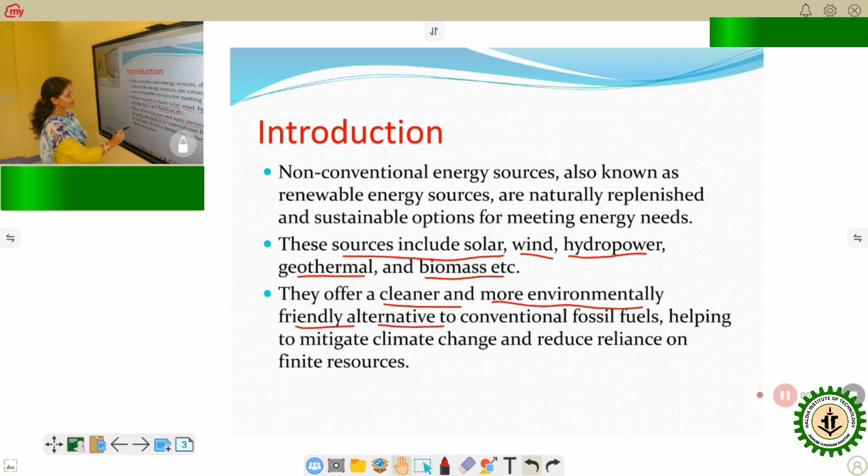Non-conventional energy sources, also known as renewable energy sources, are naturally replenished and sustainable options for meeting energy needs. Replenished means they are not depleted. These sources include solar, wind, hydropower, geothermal, biomass, tidal, etc. They offer a cleaner and more environmentally friendly alternative to conventional fossil fuels, helping to mitigate climate change and reduce reliance on finite resources.

What are the renewable energy sources? One is solar energy, wind energy, biomass energy, geothermal energy, tidal and wave energy, and hydropower.

Now discuss only the overview. Today we will discuss only the overview of solar energy, wind energy, biomass, geothermal, tidal, wave and hydropower. That means discuss only what is solar energy, what are the challenges of solar energy, what are the advantages and what are the disadvantages.

Now first discuss solar energy. It captures sunlight using photovoltaic cells or solar thermal collectors and converts sunlight into electricity or heat. That is solar energy.

What are the advantages of solar energy? Abundant and free, low operational cost and scalable. These are the advantages of solar energy.

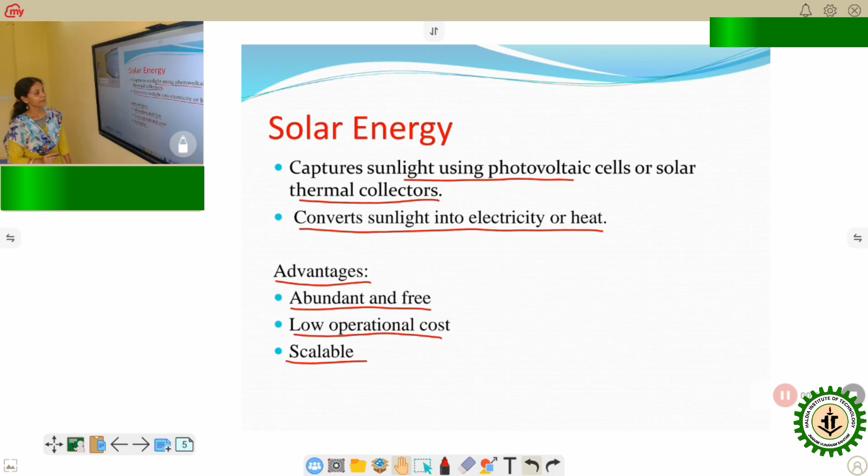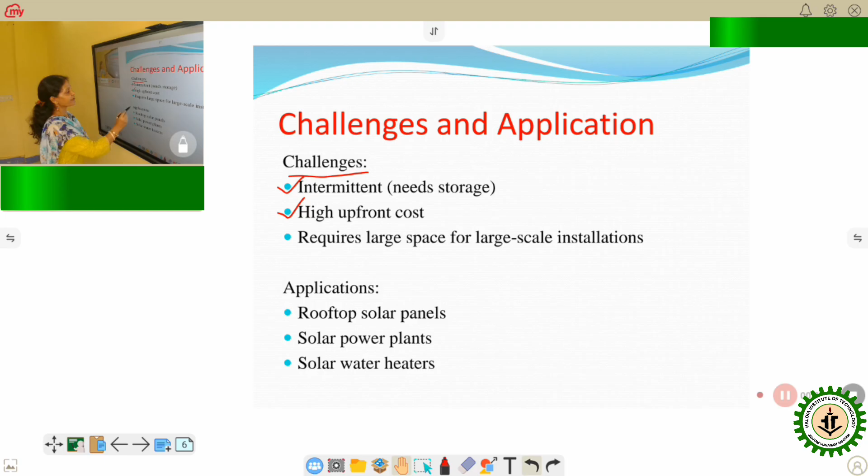What are the challenges and applications of solar energy? The main challenges of solar energy are: it is intermittent, meaning it needs storage, has high upfront cost, and requires large space for large scale installation, meaning it requires large land area for large solar farms.

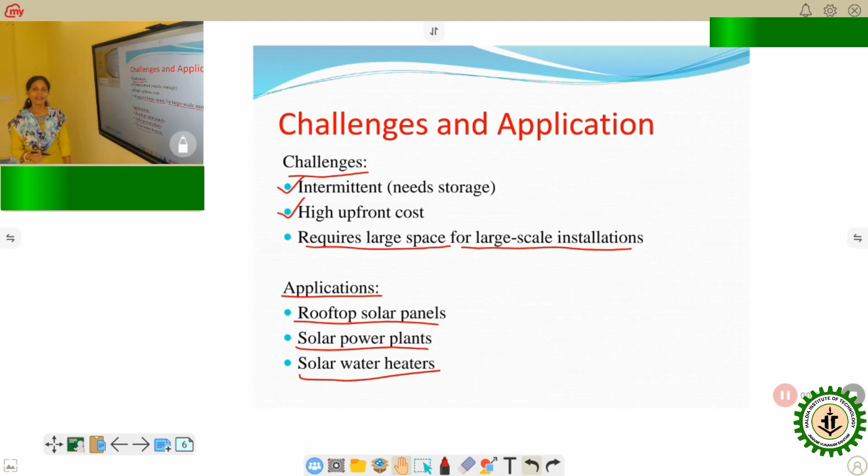What are the applications of solar energy? The applications of solar energy are rooftop solar panels, solar power plants, and solar water heaters.

Now what is wind energy and how is it produced? When the wind turbine converts wind power into electricity, then wind energy is produced.

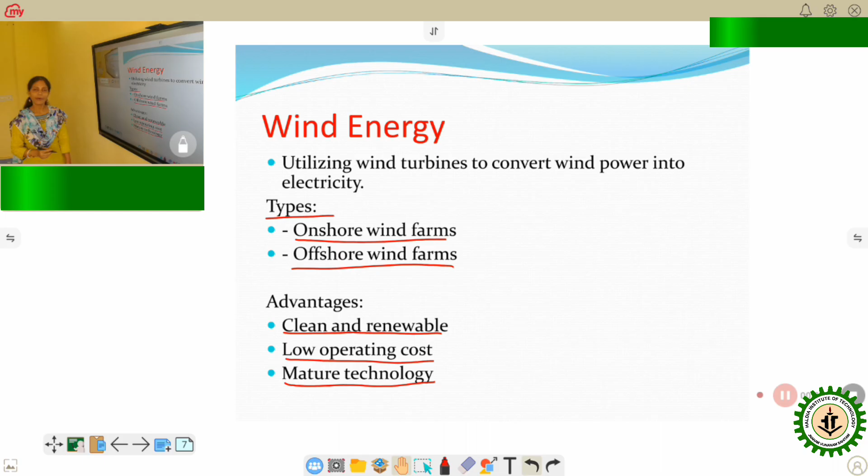What are the types? Onshore wind farms and offshore wind farms. What are the advantages of wind energy? Wind energy is clean and renewable, has low operating cost and is a mature technology. These are the main advantages of wind energy.

Now, what are the challenges of wind energy? The challenges of wind energy are visual and noise impact, variable wind speeds, and land and location constraints. Variable wind speeds means wind energy depends on wind speeds, and we know wind speeds are not fixed, they are variable.

That's why these are the challenges of wind energy. For a large wind farm, a proper location and land are required. That's why land and location constraints, along with variable wind speeds, are the main challenges of wind energy.

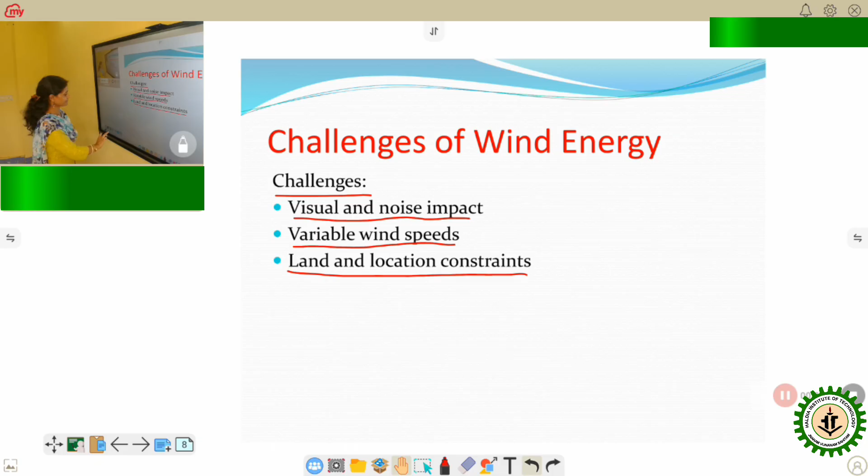Now biomass energy, how is it produced? Organic matter, meaning plant or animal waste, is used to produce biomass energy.

What are the methods for harnessing biomass energy? When plants or animal waste are burned, biomass energy is produced. This method is called direct combustion. There are also anaerobic digestion and gasification. These are the methods of harnessing biomass energy: direct combustion, anaerobic digestion, and gasification.

Now, what are the sources of biomass energy? I have already discussed these: agricultural waste, forest residues, animal manure, and municipal solid waste. These are the main sources of biomass energy.

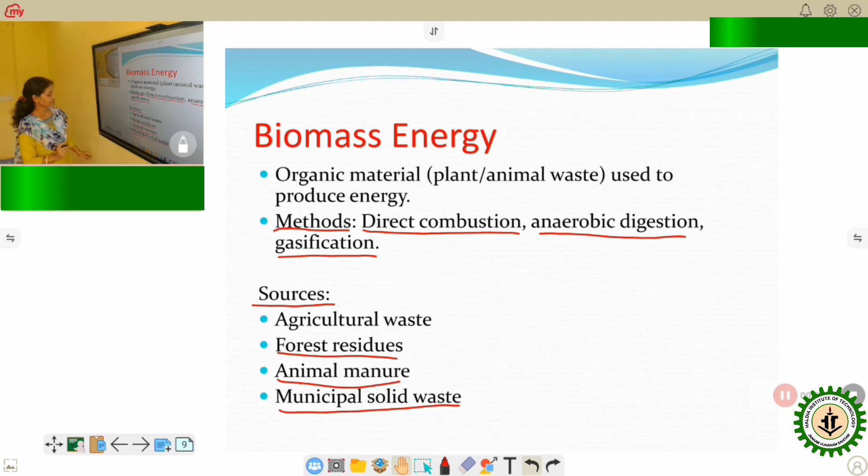Now, what are the advantages and challenges of biomass energy? The challenges of biomass energy include emissions if not managed well. As one method of harnessing biomass energy is direct combustion, this is one of the challenges - emissions if not managed well can be dangerous for health. Other challenges include competing with food production, and collection and transport issues. These are the main challenges of biomass energy.

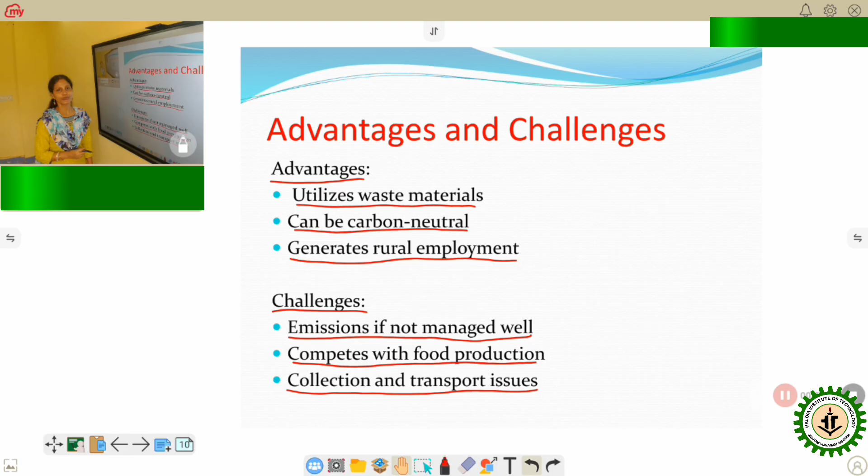Now, what are the advantages of biomass energy? One is that it utilizes waste material, can be carbon neutral, and generates rural employment. As the sources of biomass energy are agricultural waste, municipal waste, and animal waste, these are the main advantages of biomass energy.

Now, geothermal energy.

Geothermal energy uses Earth's internal heat to generate electricity and heating.

What are the sources of geothermal energy? Hot water reservoirs, dry steam wells, and geothermal heat pumps. These are the main sources of geothermal energy.

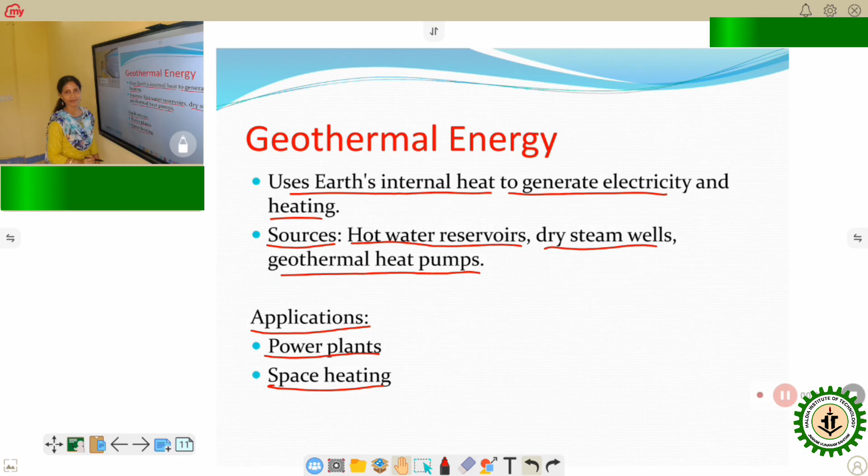What are the applications of geothermal energy? Power plants and space heating.

What are the challenges and advantages of geothermal energy? The advantages are: reliable and consistent, low emissions, and small land footprint. These are the advantages of geothermal energy.

What are the challenges of geothermal energy? Geographically limited, high drilling cost - since one of the sources of geothermal energy is hot water reservoirs. So the main challenges are high drilling cost, risk of surface instability, and being geographically limited.

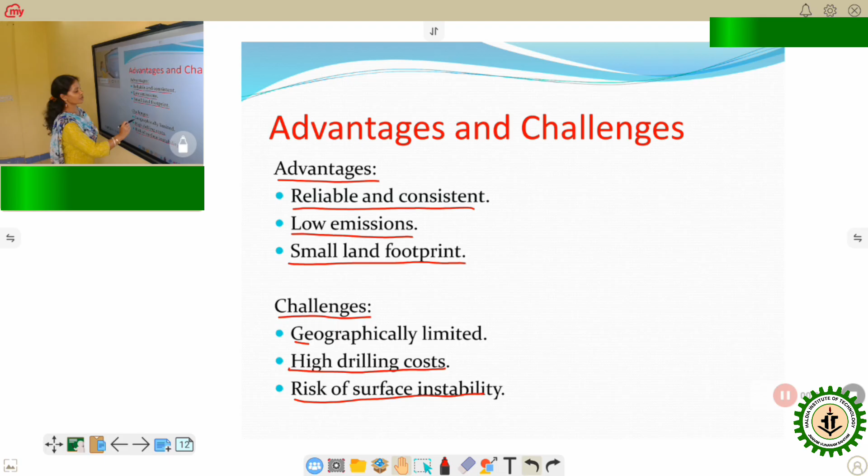Now, tidal and wave energy. Tidal and wave energy depends on the ocean tides, converting ocean tides and waves into electricity.

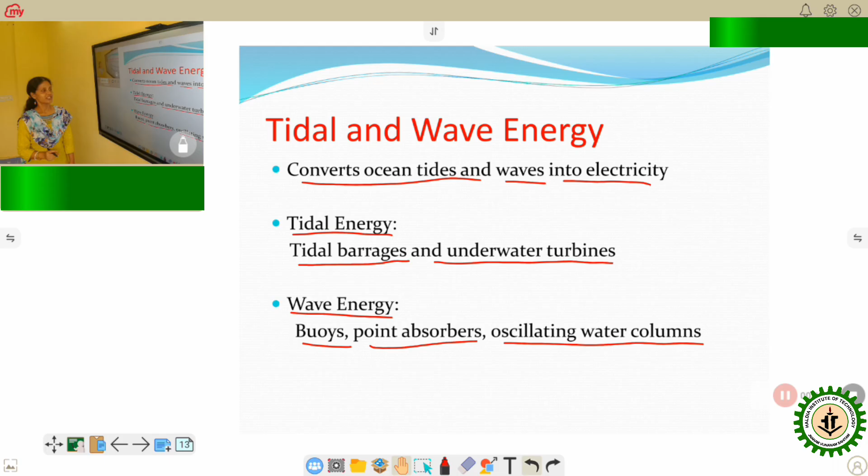Tidal energy includes tidal barrages and underwater turbines. Wave energy includes point absorbers and oscillating water columns. These are the tidal energy and wave energy technologies.

What are the advantages and challenges of this energy? The main advantages are: predictable energy source, environmentally clean, and long operational life. These are the advantages of tidal and wave energy.

What are the challenges? High initial and maintenance cost, since it depends on the ocean tides. That's why it requires high initial and maintenance costs, and there are environmental impacts on marine life from harnessing electricity from ocean tides.

This is the challenge of tidal and wave energy - environmental impacts on marine life, and technological complexity.

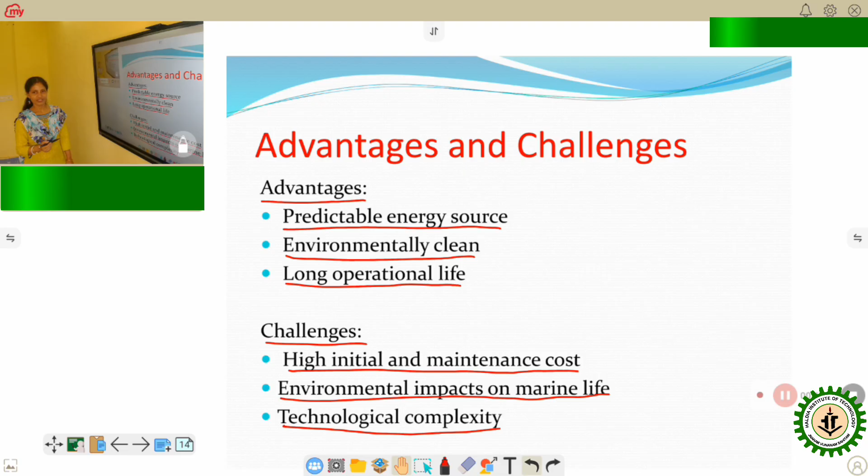Now hydropower. What is hydropower? Hydropower energy, also known as hydroelectric energy, is a renewable energy source that harnesses the power of moving water to generate electricity. It uses the force of falling water.

It uses the force of falling water or fast flowing water to turn turbines, and that turbine is connected to generators, and the generator produces electricity. These are the processes of harnessing hydropower.

Hydropower is a well established and widely used form of renewable energy with a long history of providing electricity and other benefits.

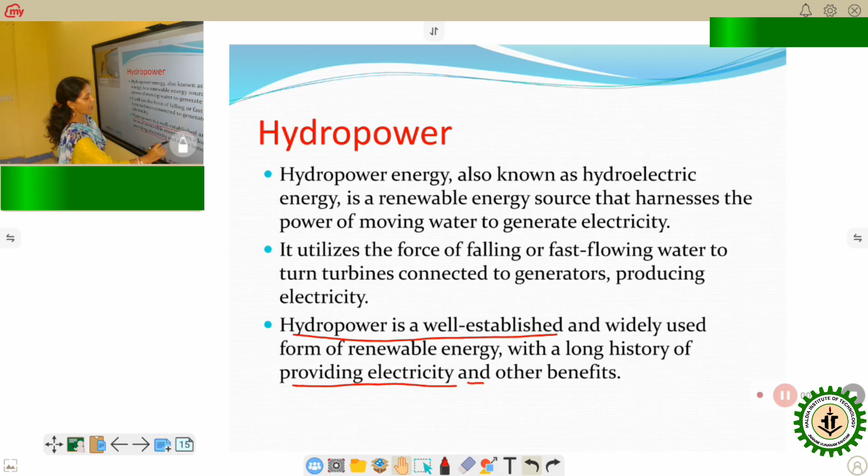What are the advantages of hydropower? These are: renewable and sustainable, clean energy, flexible power generation, water management, and recreational opportunities.

This hydropower depends on the dam, and this dam is also used for recreational purposes like boating, fishing, and swimming. Dams used for hydropower give some recreational opportunities like fishing, boating, and swimming.

That is recreational opportunities. Now what are the disadvantages of hydropower? Environmental impacts - dam construction can impact marine life, land use, siltation, and drought impacts.

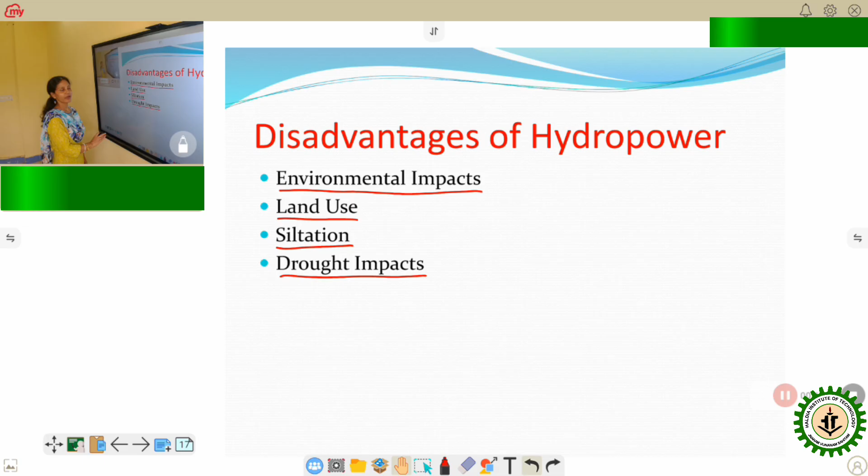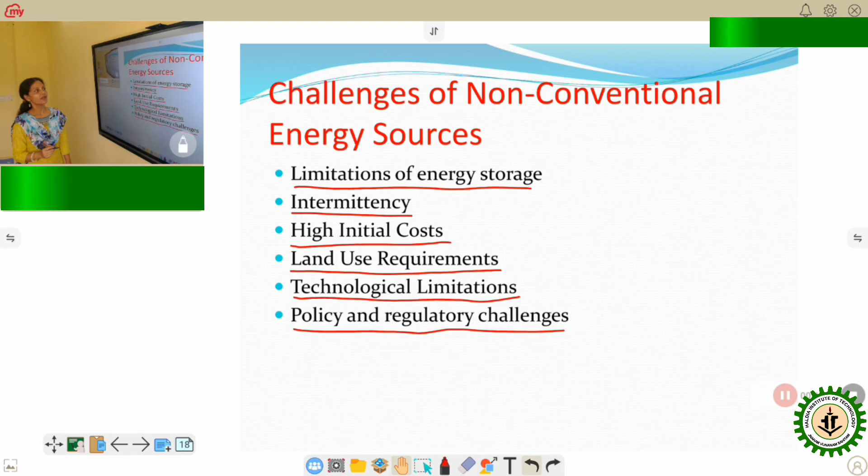What are the challenges of non-conventional or renewable energy sources? These include: limitations of energy storage, intermittency, high initial cost, land use requirements, technological limitations, and policy and regulatory challenges. These are the challenges of renewable energy sources.

Now, what are the future prospects of renewable energy sources? Technological innovations like smart grid and AI in energy management, investment growth in renewable energy, and the cost of renewable energy declining rapidly.

This is the future prospect, as nowadays non-renewable energy sources like oil and fossil fuels are being depleted. That's why the cost of renewable energy is declining rapidly, to transfer from non-renewable to renewable energy sources.

Enhanced energy storage solutions, global policy alignment like the Paris Agreement, and integration with electric vehicles and IoT. These are the future prospects of renewable energy sources.